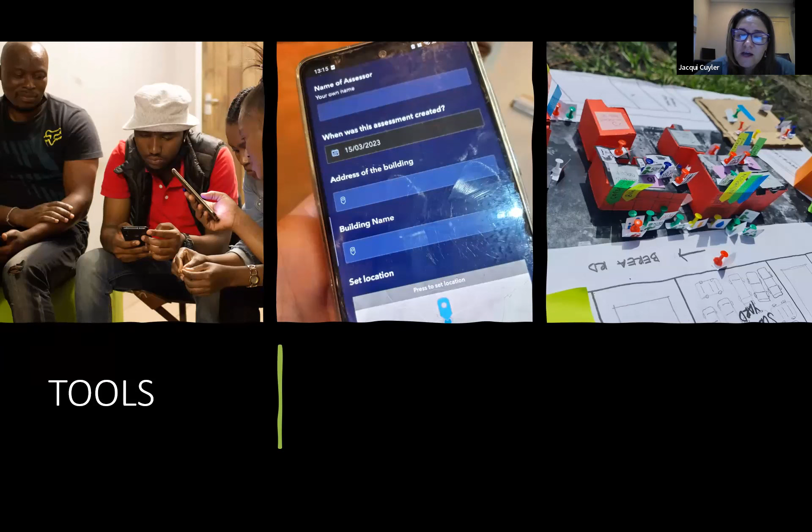These tools are here to bring us together - as professionals, as engineers, as architects, as developers, as plumbing specialists, as service delivery professionals, and as municipalities and government - to bring the language together, so that our communities speak the same technical language, or some technical language, that professionals speak, and the professionals hopefully can also understand where the communities are coming from.

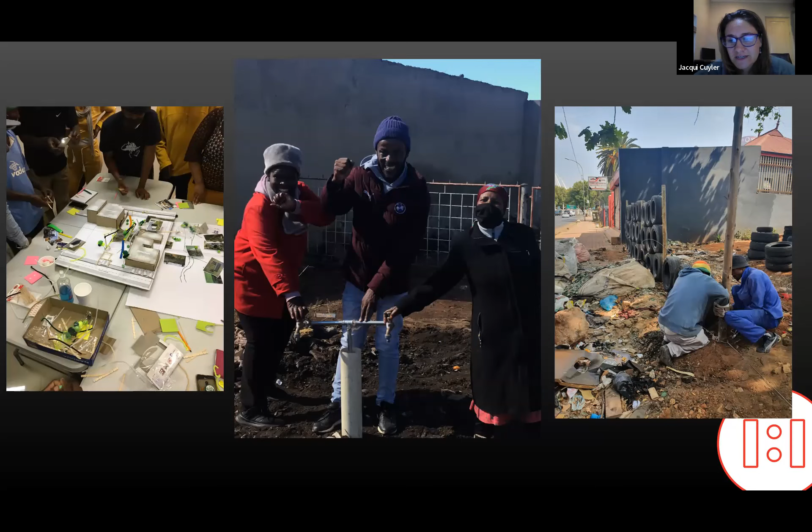We've been developing roadmaps for upgrading, and we've had some impact - some taps delivered in settlements. Sometimes that's the win, sometimes it's one water point, sometimes it's a fence, and sometimes it's a building design. These are the types of impacts that keep us going.

We need a multidisciplinary team to look at these crises. The multidisciplinary team is incredibly important to see all aspects of the problem. Then we have the privilege of focusing on things from an architectural approach, with the skills that we have, without stepping on the toes of policymakers, government officials, or human rights lawyers. It just means that we have to have them with us.

Thank you very much. I hope I've asked some questions and answered not so many.

Thank you very much for this analytical address to our call. You managed to pick up each one of the words you use and provide real meaning to our concept. So really, thank you.

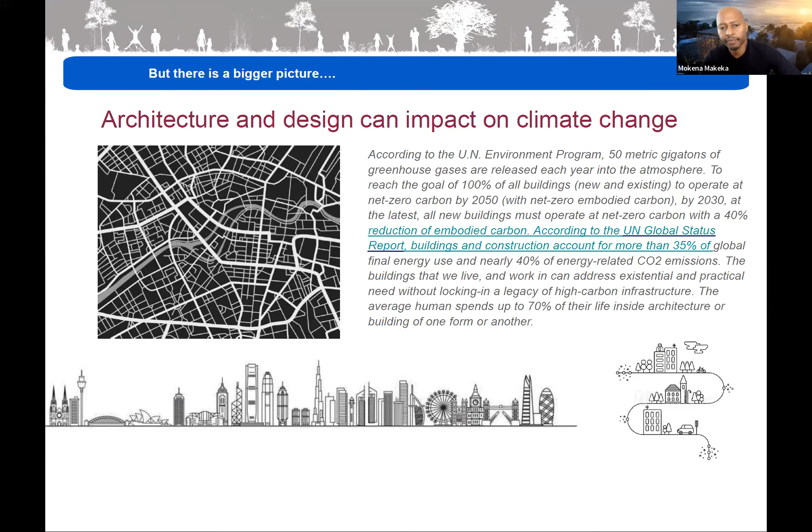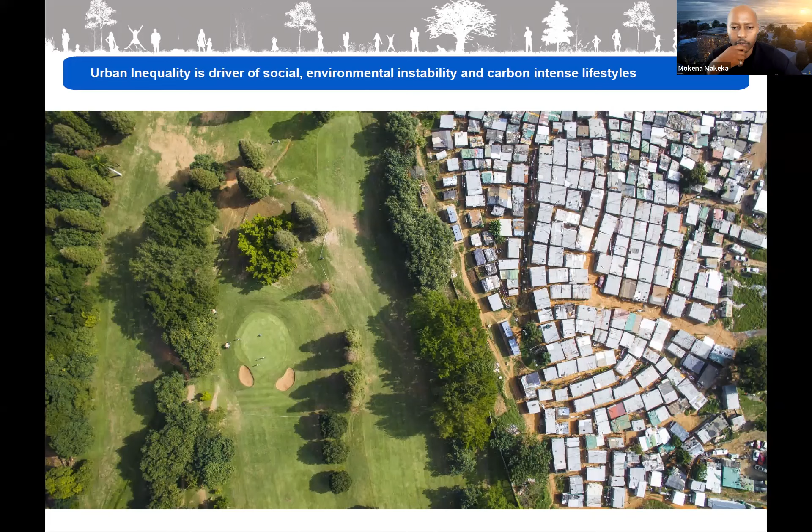But it's important to reiterate that architecture and design can impact climate change — we're not passive agents in this broader question of how to protect environments. The way we think about net zero embodied carbon, both at the top end of buildings and how we think about housing in an inclusive fashion, has a huge impact on how we can reimagine our cities. When we don't do this, it produces high degrees of urban inequality, but also drives carbon-intense lifestyles — intense inefficiencies in terms of access to resources, livelihoods, and so on — and increased environmental instability. So we have to decouple our carbon-intense lifestyles from how we currently imagine placemaking and urban design.

My previous colleague spoke about the importance of housing versus human settlements, and I hold this as true. The term housing remains very popular both within our profession and broadly, but I want to draw a distinction: we've seen many projects where in the provision of housing, human settlement and place gets lost. When we think about public space, integration with commercial opportunity, local communities, public accessibility and even public transport, very often in a housing narrative these fall off the table. They're not included in the financial narrative, and housing is provided, but it produces very negative environments, as shown by my colleagues. So I repeat the importance of being cautious about using housing as a frame for what is effectively the question of a sustainable human settlement.

I also make a distinction because lately it's quite popular to talk about human-centric design, as if somehow the human being is the ultimate objective in how we think about urban development. I actually think there's a higher level of consciousness required, and I call it a planet-centric approach. In the beginning, when we think about design and architecture, it's what I'd call technocentric—it's the technology, how we assemble buildings and so on. We've now evolved to understanding human centricity, but I think we now need to get to planet centricity, which is about humans in relation to environment and in relation to ecology.

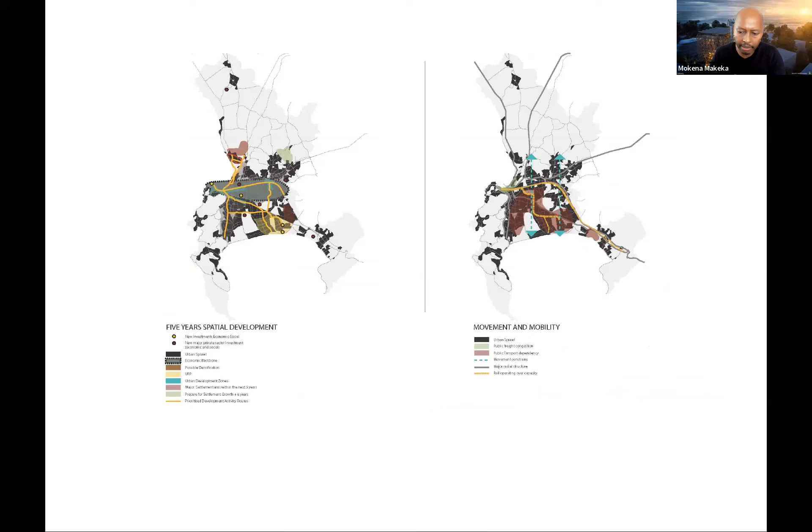Now, moving to where this theory hits the ground, I'd like to share with you one project based in Cape Town in an area called Scottsville. I'd say a lower middle income area with high degrees of unemployment, but some degree of formal infrastructure. Those of you who know Cape Town and South Africa know that we often, perhaps unfortunately, compete with Brazil in terms of having the highest levels of inequality from a Gini coefficient perspective.

So we toggle between South Africa and Brazil between 2016 and now, and this is something that we're not proud of. But in the city that I'm in, which is both beautiful and attractive in so many ways, it also has high degrees of inequality and informal environments and a housing backlog that is quite serious. So it's also important to point out the contrasts of these sorts of cities.

Now, the site that I had the opportunity to work on is really the quadrant on the top left-hand corner, and you see these diagonal lines. What I did was to really try and understand place and existing patterns of movement, and to use that to inform how the site could actually work. On the bottom right-hand side, you'll also see there's a railway station. So for me, it was about connecting this housing opportunity to public transport, but also re-articulating space in a way that acknowledges the past, acknowledges history, and acknowledges place.

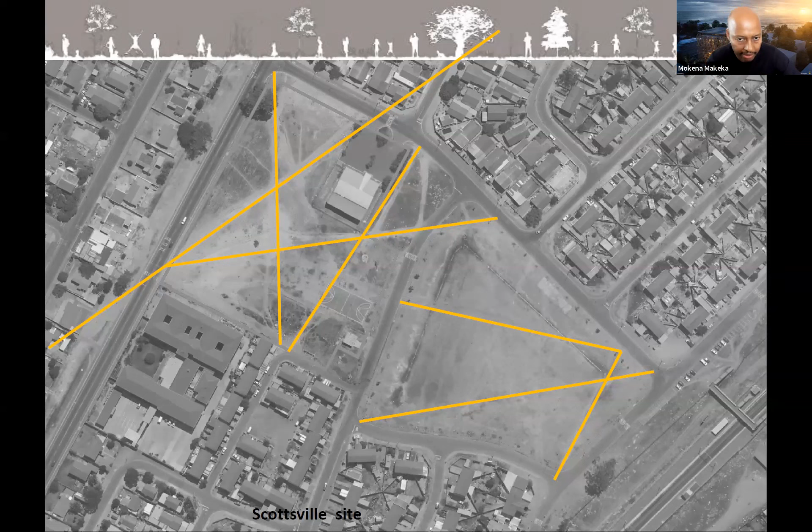A typical response, as one would imagine from most urbanists, would be to create a perimeter block with a series of internal courtyards to create street. In many ways, this is urban design 101, and I think it's useful and important as a departure point for design. But as you can see there, these orange circles represent the intersection between these different movement lines, and they represent energy to some extent.

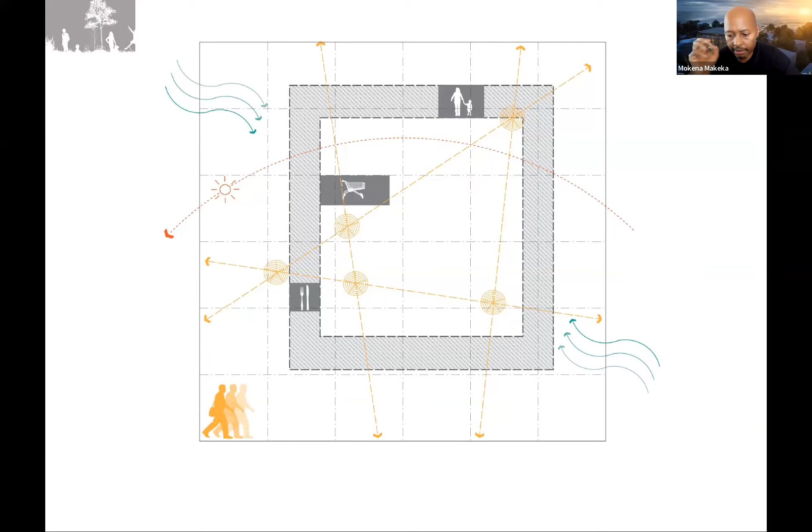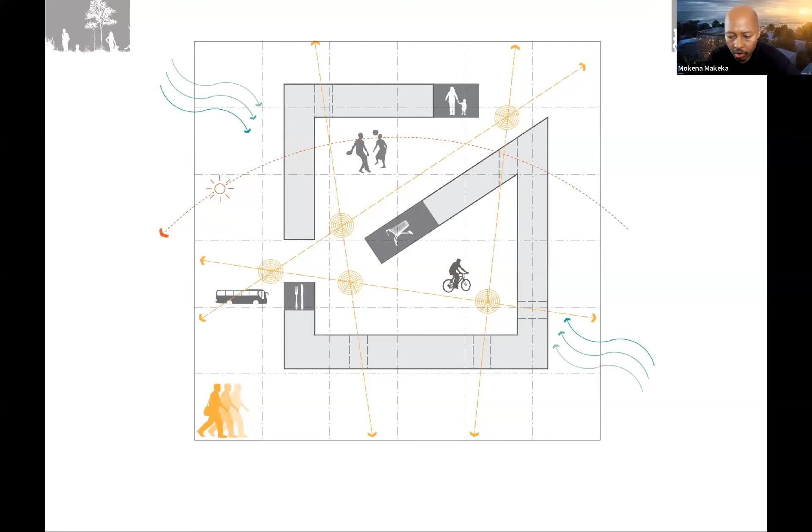I decided to deform the urban block to acknowledge these urban linkages so that the housing doesn't create an internal cloistered courtyard divorced from public space and the city, but rather brings the city and public space into the heart of the design, while also acknowledging existing movement patterns. This allowed me to create a very different urban response, still creating street, but also allowing the public realm to come right into the heart of the project.

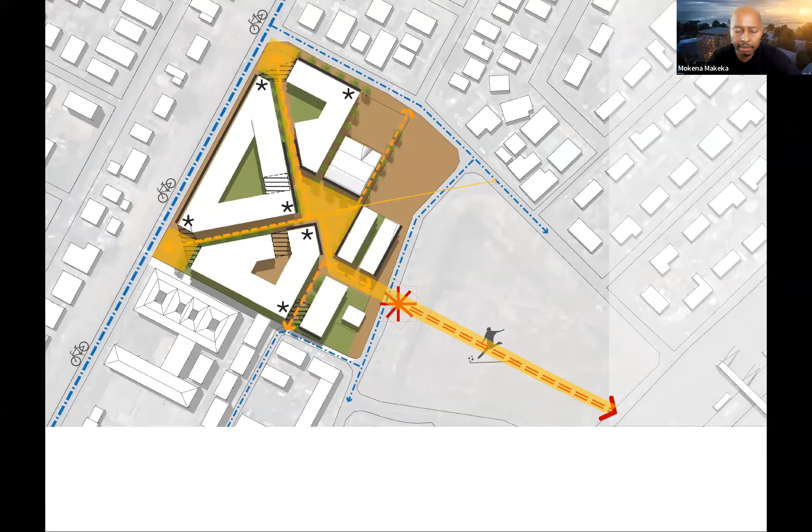Then understanding what that means in terms of smaller size courtyards, but also aggregating the architecture together so that you get economies of scale from a housing point of view. So not one house, one plot, but really a redefinition of what an apartment block would look like, while still giving intimacy in certain parts of the project.

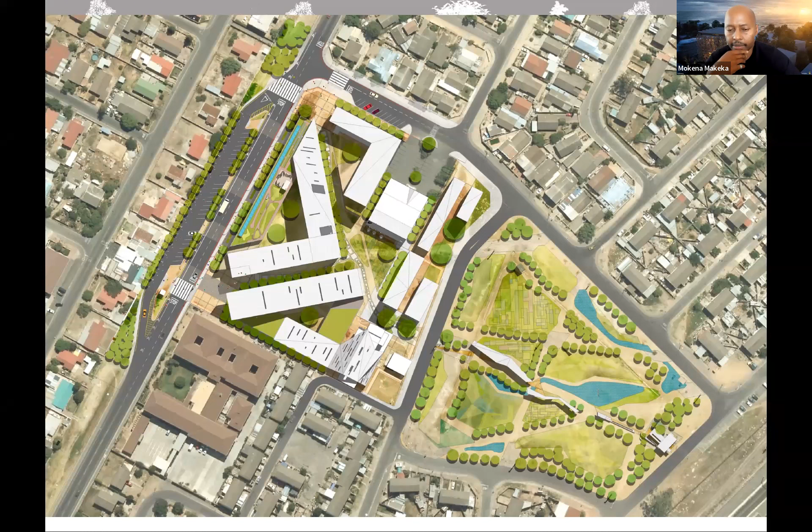In terms of the plan view, what we also did was occupy an adjacent piece of land, which was used as a derelict soccer pitch. I conceptualized it as an urban food park where residents would be able to grow their own vegetables. There was this idea about how one can create commerce, and how we can also not only re-green the city from a landscape and impression perspective, but also from a food sovereignty point of view.

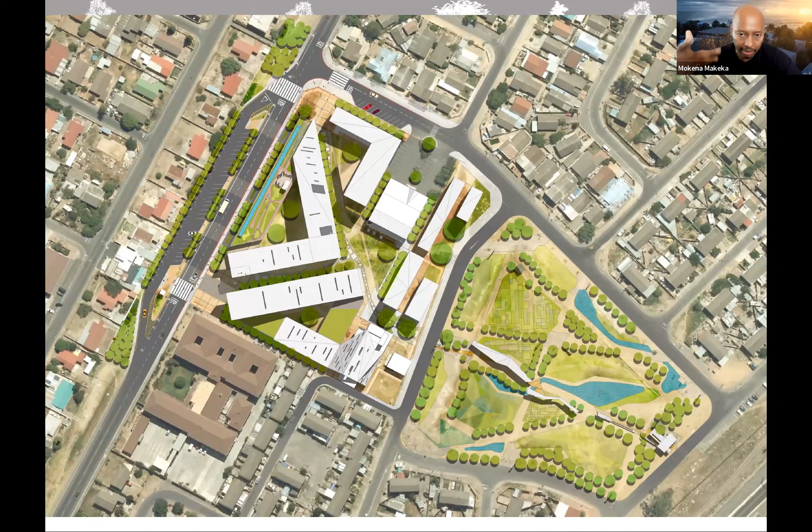I think all too often when we think about landscape design, we see it as the beautification of the city as opposed to its productive potential. So we need to think much more intensely about food production within cities, because that creates jobs, but also creates better opportunities for nutrition. I actually think it's a more ecological, sustainable perspective for how we should be thinking about greening our cities.

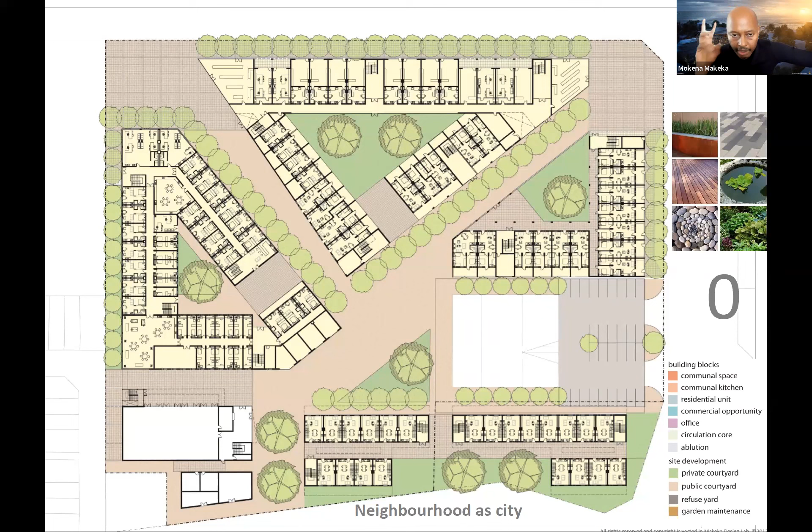In terms of the actual architectural layout, there are 7 different typologies, which is also unique. It moved all the way from hostel shared bathroom arrangements up to about 2 to 3 bedroom units. That was quite intentional, to try and capture as many different sectors of society within the same site. My construct was to think of the neighborhood as the city and the city as the neighborhood, and not see housing as dealing with only one financial segment of society, because I believe that produces the ghettoization of culture too.

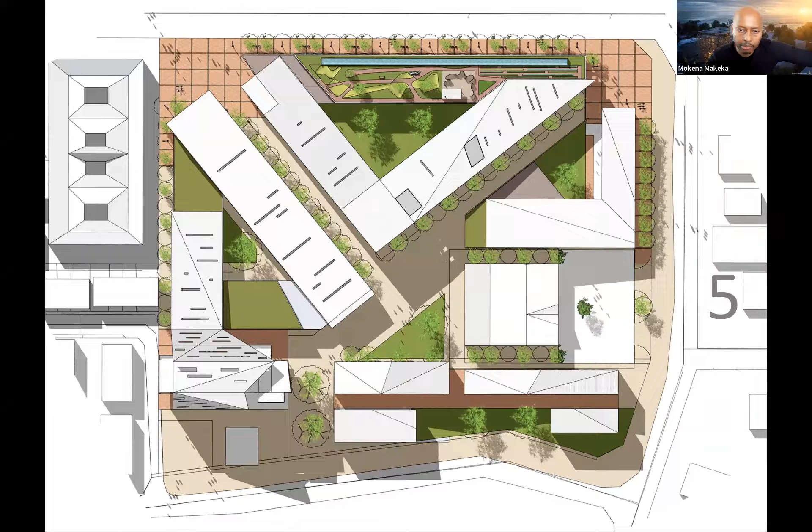This was then coupled with weaving in internal public spaces with varying degrees of privacy, understanding how you bring buildings close together so that you can create shadows, which are vital during the hot summer months. So the urban form, the movement system, the food production strategy, and the housing distribution all came together. I'm very passionate about the importance of scale: how we make street 3-story walk-ups, but as you get closer into the deeper parts of the site, 4 to 5, 6 stories, actually pulling away from the street itself. These are just very quick schematic iterations of how those units began to work, also ideally offering some degree of greenery within the piece.

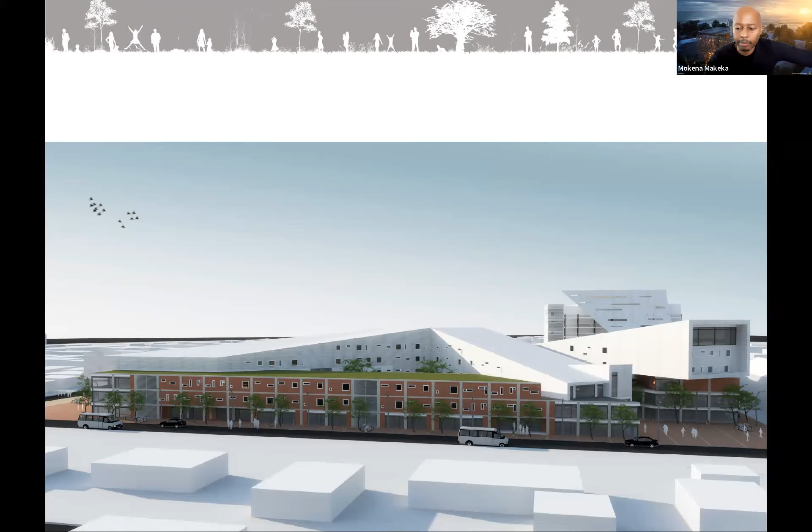Now, what's fascinating about this is that people say, well, does this look like housing? It looks like an institutional building, etc. But I think it was a deliberate attempt to deconstruct this image of what a human settlement has to look like, moving away from this suburban ideal, which still seems to be very predominant in terms of our financial modeling, and actually excludes a whole lot of other actors.

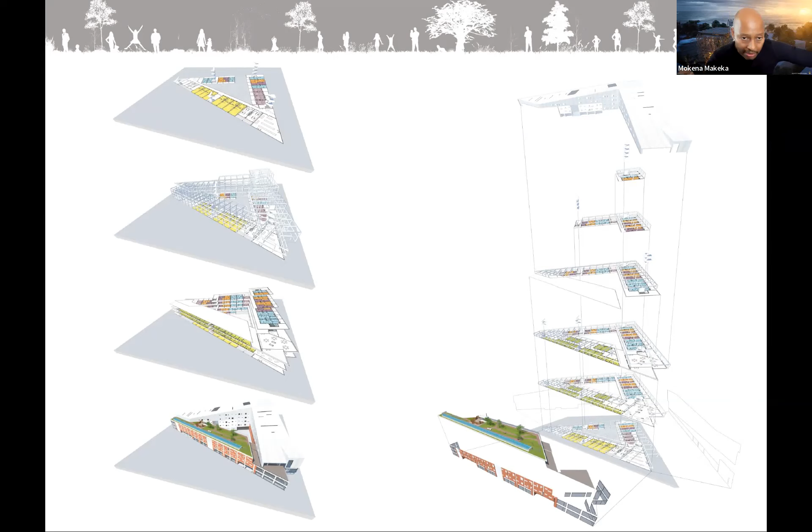Construction strategy was assembled using really thinking about lightweight materials, a combination between steel and wood, and then obviously brick and concrete frames in a certain section, but very much this idea of rapid assembly, the ability for the building to be refurbished by people on site, and that in fact the maintenance of the building also becomes a sort of job opportunity and job creation device.

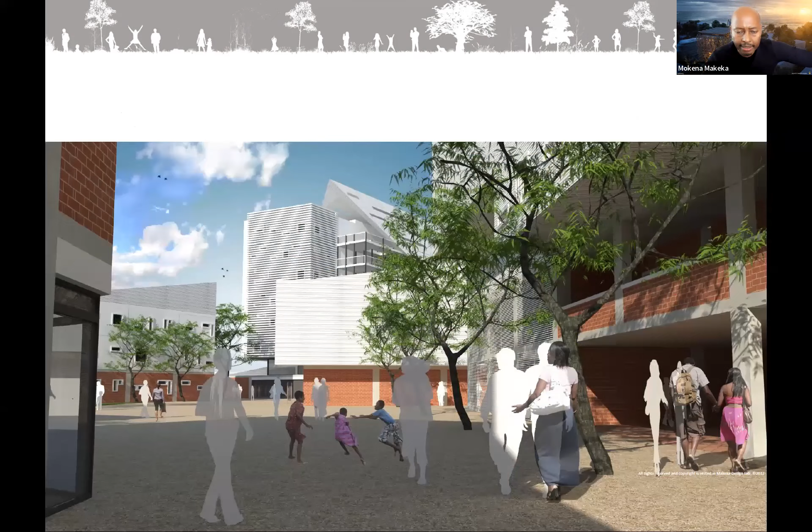I was quite intentional about changing the visual aesthetic of the human settlement, and beginning to make provocations about how the public spaces could be used differently for internal food production, as mentioned. Here's a quick section where you can see the pink section works as an opportunity for commerce on the ground floor, with access towards the back, bringing light in via a central corridor, and having a sort of live-work commercial opportunity arrangement.

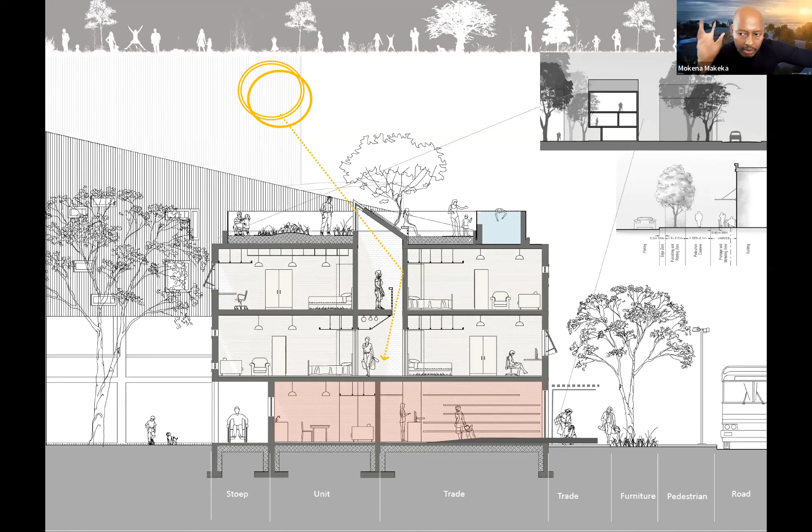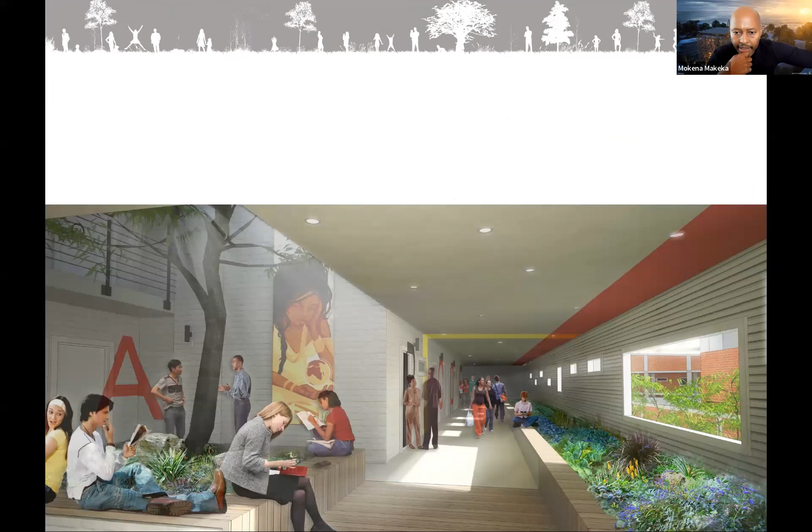We often forget this because it's quite commonplace that when people imagine housing, they don't actually think as much about what are the economic opportunities and how a unit can be converted into a place of commerce and job creation. I think it's vital, particularly in the global south with depressed economies, to think of housing not as an object in itself, but really as a vehicle towards livelihoods. This is just an internal render looking at some of those spaces and how they could begin to be articulated. Moving quickly onto Rwanda, so less imagery here.

This exercise was really about understanding the challenges of another African country, very similar challenges to South Africa. Obviously, the financial metrics are slightly different, but the broad principles about housing provision is actually somewhat similar, and that's why I thought I'd share it.

Kigali has a master plan about enhancing green growth, but also a housing backlog and a vision with regards to 2050. And I, in fact, encourage all cities to have a vision about where they'd like to be between 2030 and 2050 from an SDG perspective and beyond.

One of the things we found, among a couple of challenges: limited liquidity of households, high degrees of rental, median incomes that make it difficult to afford housing in the way we understand, a high cost of borrowing, and limited availability of data to inform the offering. So the bankers are using either outdated algorithms or don't have enough data to understand what people can actually afford. This produces a whole series of challenges in terms of their own version of the gap market, a structural lack of affordability, even though potentially those people can afford that.

In Kenya, where we've also done some work, communities actually aggregate capital. And you find that if you look at housing provision from a community perspective, the affordability works. But if you look at it from an individual household perspective, it doesn't work. So even the way we think about funding housing, I think, needs to be much more agile to recognize the realities of the global South.